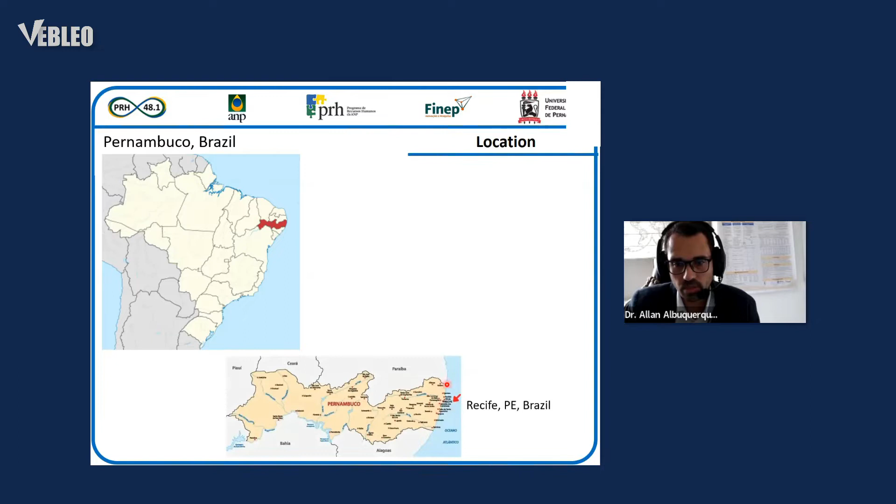I'll talk a little bit about our location. We are located in Brazil, a South American country, more specifically in Pernambuco state, located in the northeast. The capital is Recife, where we are at the Federal University of Pernambuco. We have at least, before the pandemic, 40,000 people per day, including students and professionals.

We are located in the Department of Nuclear Energy, and we have financial support from the training program for human resources financed by the Brazilian National Agency for Petroleum, Natural Gas, and Biofuels. I've been working in the PRH, where we focus on research in characterization and simulation of reservoirs, environmental biotechnology, and renewable energy. My field is renewable energy, in the bioenergy group where I'm located.

We also have an experimental biorefinery for solid organic waste. Our group has some objectives, for instance, to develop organic waste management on our campus, and also to train students and professionals, to develop research, and also to transfer low-cost technology for control purposes.

We focus on work in sustainable energy production from biomass and waste, for example anaerobic digestion using food waste and residual biomass and palm, and also second generation bioethanol production based on food waste and other raw materials, and also biodiesel production using waste cooking oil and other kinds of processes.

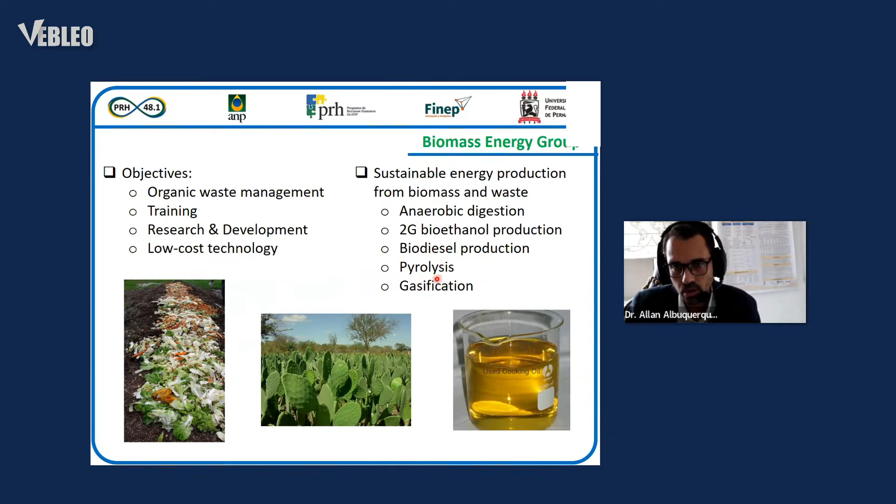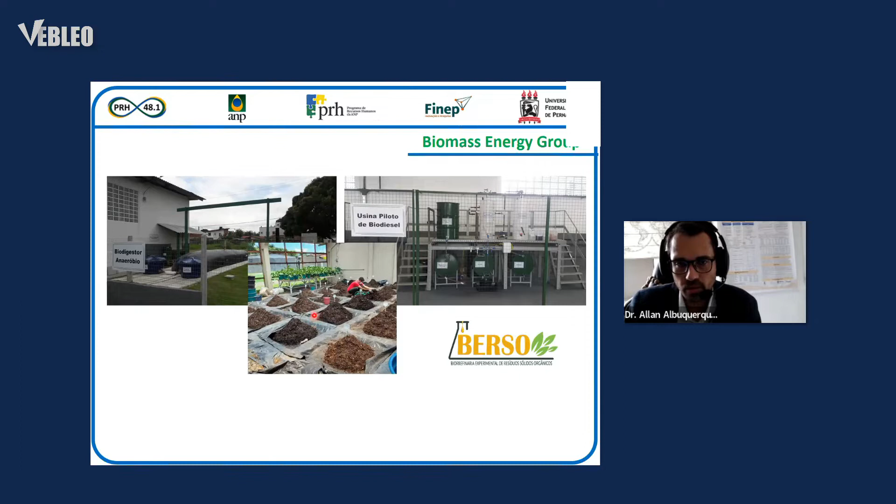We have an anaerobic digestion reactor using food waste to produce biogas, used for electricity and also for cooking gas, and also a pilot plant for biodiesel production using waste cooking oil that is used for buses from our university. We also have biofertilizer produced to be used at the university.

Starting my presentation, I'll talk a little bit about biodiesel, focusing on Brazil, since we know that the three largest producers around the world are the US, Brazil, and Indonesia. In Brazil, we started to be concerned about biodiesel in the 1970s. Biodiesel is a fuel composed of alkyl esters and can be used in internal combustion engines, and can replace partially or totally petroleum diesel.

After this event in the 1970s, for some economic reasons Brazil didn't stay too interested in biodiesel, but in 2004, because of the Brazilian National Program for Production and Use of Biodiesel, we started to pay more attention. In 2008, the ANP imposed a 2% addition of biodiesel to petroleum diesel. Since then, for macroeconomic, social, and environmental reasons, we now have 10% biodiesel in petroleum diesel this year. It's expected to reach 15% in 2023.

The main raw materials used in many countries are edible oils, and also in Brazil soybean oil is very important. But the problem is these raw materials can represent 85% of the biodiesel cost. For this reason, many authors and researchers are trying to develop biodiesel production using non-edible oils, such as rapeseed oil, crude tall oil, and others.

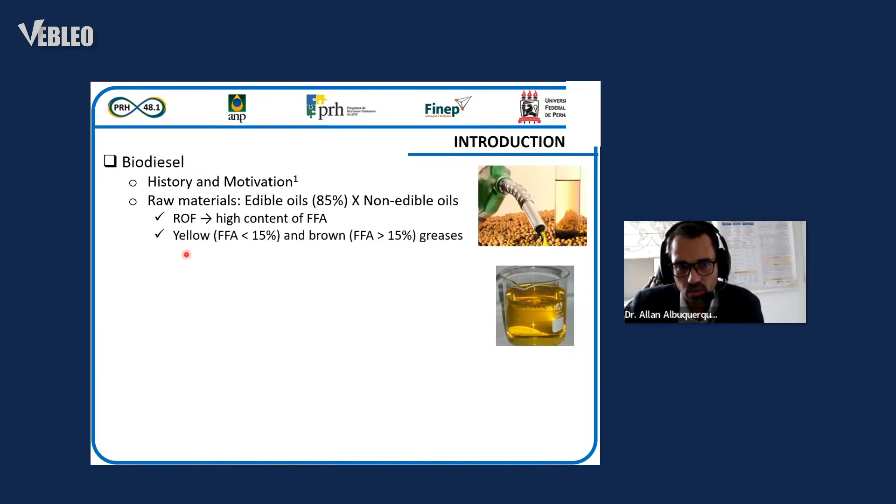Another option is residual oils and fats, ROF, composed of waste cooking oil and animal fat waste. The problem is these raw materials have a high content of free fatty acids, FFA, and can be sold as yellow grease with content less than 15%, or brown grease with greater than 15%. The advantage of using these raw materials is decreasing negative environmental impacts caused by improper disposal of waste cooking oil, and also decreasing raw material costs, which can represent 40 to 70% less than using edible oils.

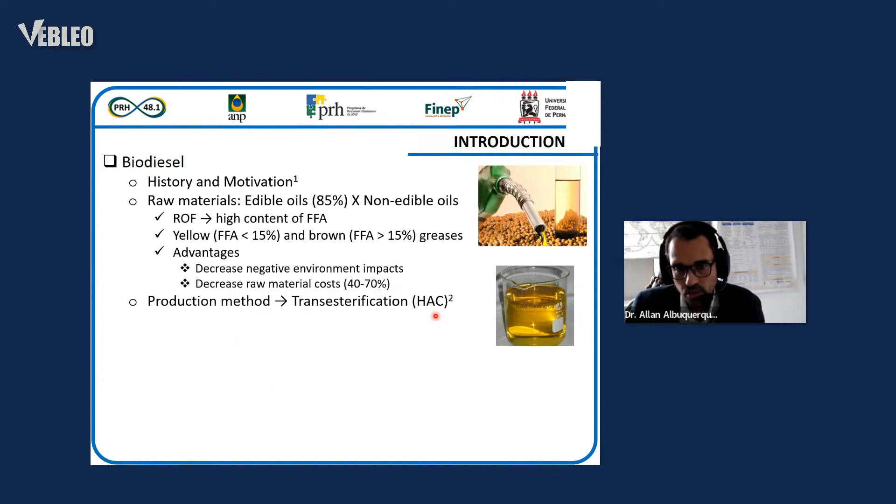We know that the conventional process to produce biodiesel is based on the transesterification reaction using an alkali catalyst. Vegetable oil, composed of triacylglycerol, reacts with 3 molecules of alcohol to produce 3 alkyl esters and also glycerol.

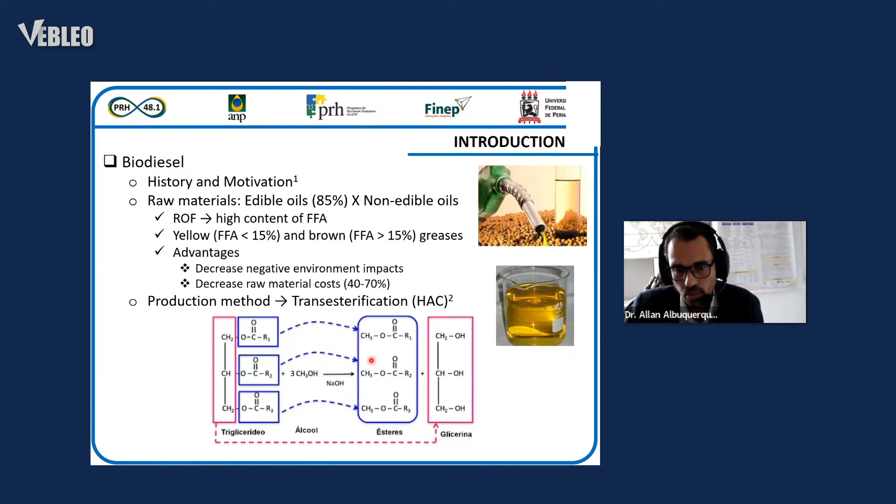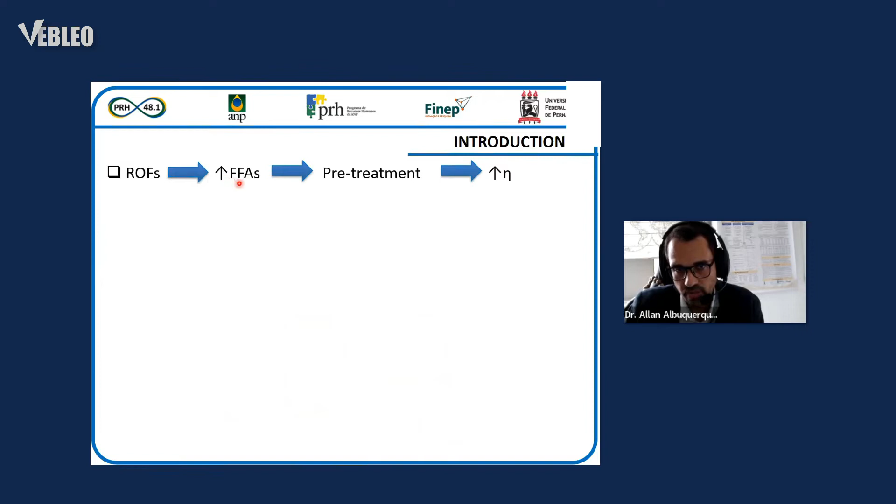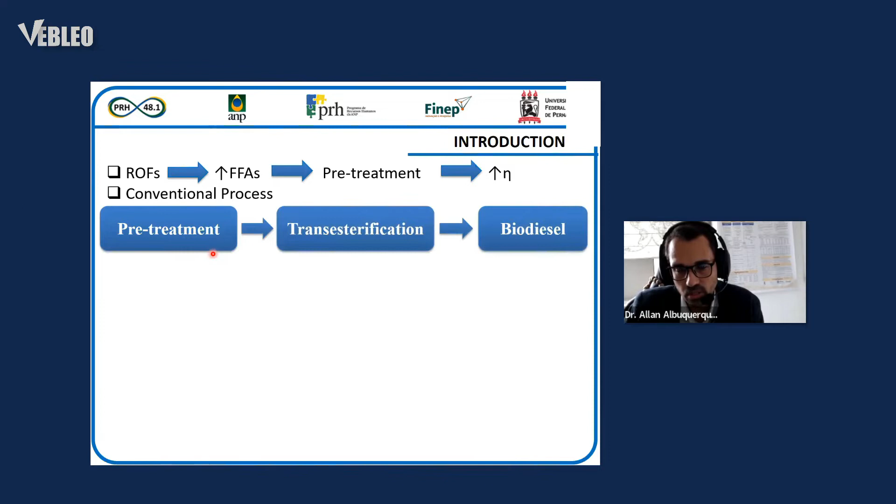The problem is ROFs have a high content of FFA, free fatty acids. In that case, we need a pre-treatment to increase the yield. The conventional process for these raw materials involves a pre-treatment before the transesterification reaction, where we use an esterification reaction on the free fatty acids in the presence of alcohol and an acid catalyst to produce alkyl ester and water. The problem is that we have more equipment in the pre-treatment, increasing capital cost, and also a glycerol washing step to remove catalyst, water, and excess methanol, which increases operation costs.

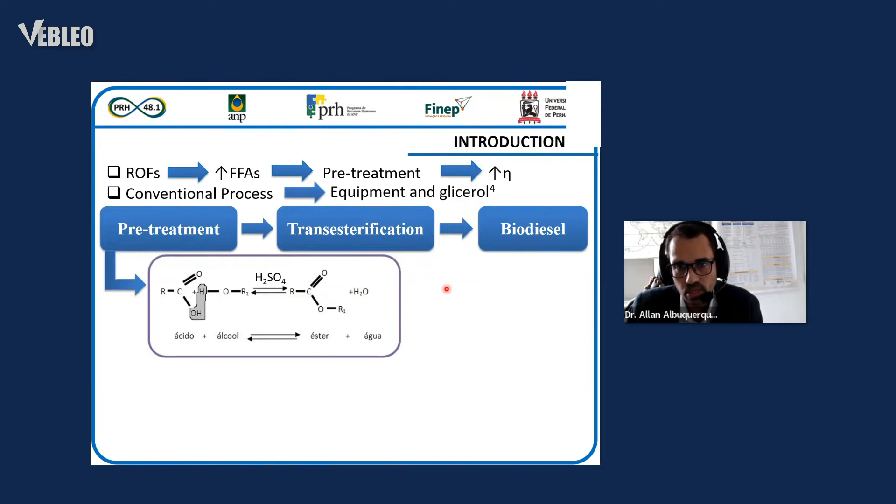For these reasons, some authors are trying to develop alternative, cheaper processes. For instance, supercritical conditions to carry out both esterification and transesterification in the same reactor, or to try to separate FFA from the triacylglycerols, or to use solid catalysts, which in my opinion must be the most promising one.

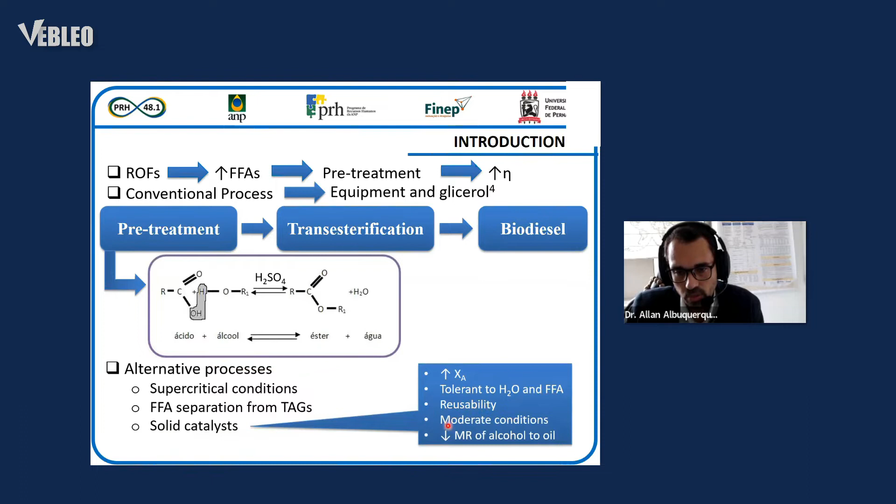Many authors are trying to develop solid catalysts that can increase conversion, be tolerant to water and FFA, with good reusability, operate in moderate conditions, and with low molar ratio of alcohol to oil. In this work we use Aspen Plus from Aspen Tech to design, simulate, and optimize some processes to make comparisons.

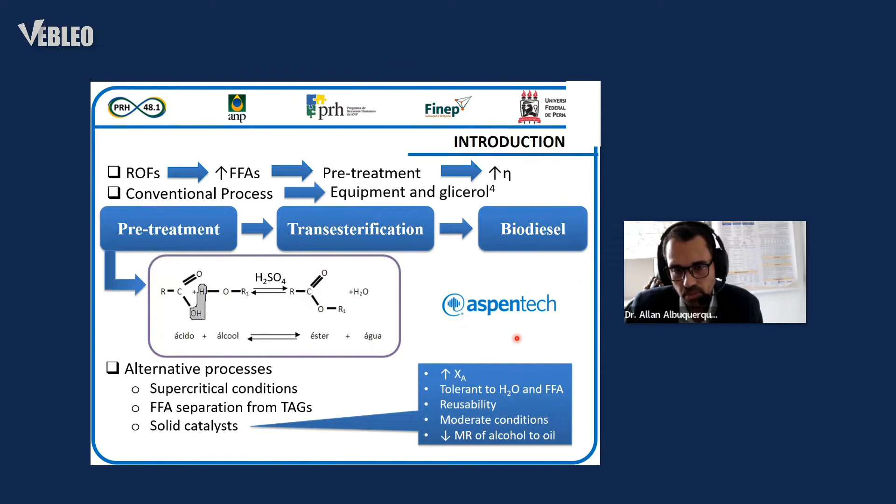There are other options, but we are focusing in this work on solid catalysts in reactive distillation. With reactive distillation we can use separation and reaction in the same equipment instead of using a reactor plus a distillation column. This way we can decrease capital costs, and also decrease solvent costs because we have a reflux ratio of alcohol, and also alcohol vaporizing in the column.

We also try to use low-cost raw materials, such as residual oil, fats, and crude tall oil, and in recent works we are working with ethanol.

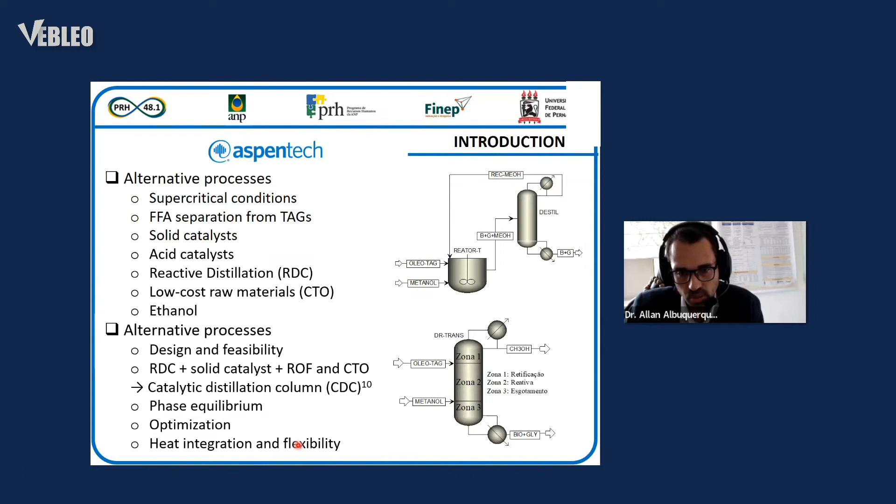We will present some results from an alternative process based on the design and feasibility analysis, combining reactive distillation and solid catalyst inside packing. We have a catalytic distillation column using these two kinds of raw materials. We also noted the absence of a phase equilibrium model applied to the reactive distillation column, so we developed this phase equilibrium model, along with some process optimization and heat integration flexibility studies.

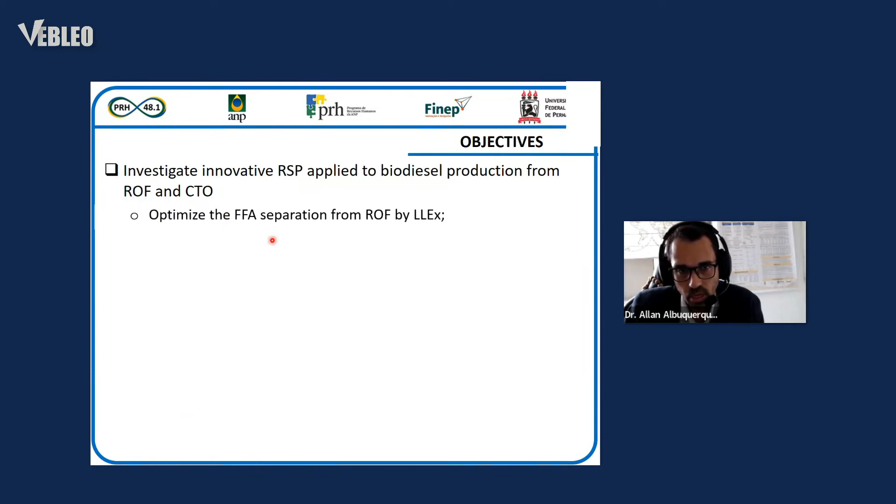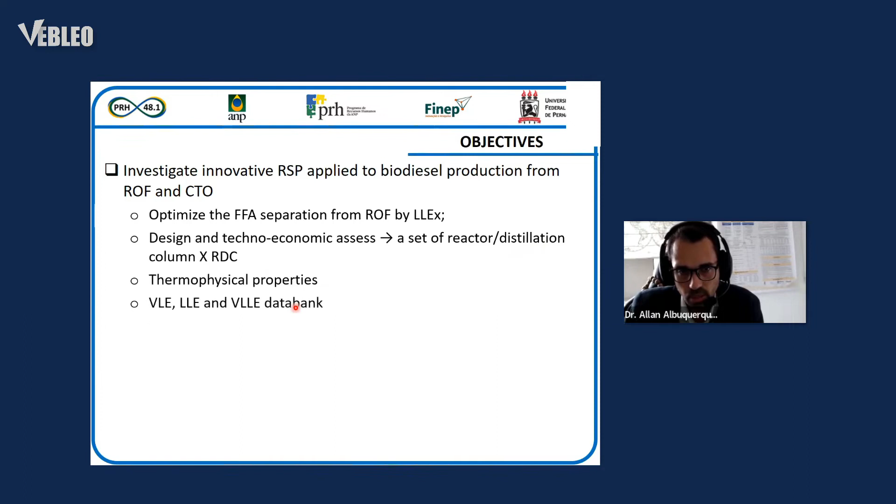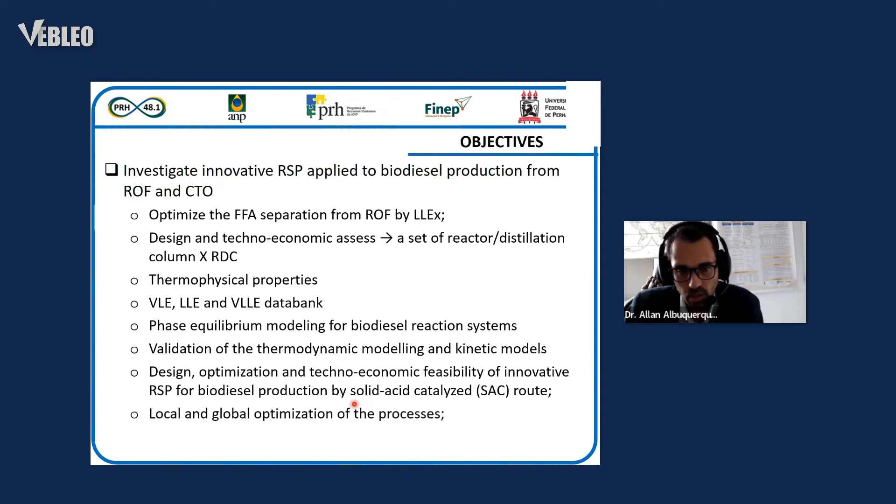The objectives are to investigate an innovative reactive separation process to do reaction and separation in the same equipment using these low-cost raw materials, to optimize separation of free fatty acids from the oil, design this process and make a comparison about techno-economic aspects between a reactor-distillation setup and a reactive distillation column. Also to estimate thermophysical properties, construct a data bank and phase equilibrium modeling to validate it, and design, optimize, and compare the process in terms of techno-economic aspects, including optimization and heat integration flexibility study.

The first paper that we published after developing this work in my PhD was on optimization of the extraction of free fatty acids applied to biodiesel production, to achieve these objectives.

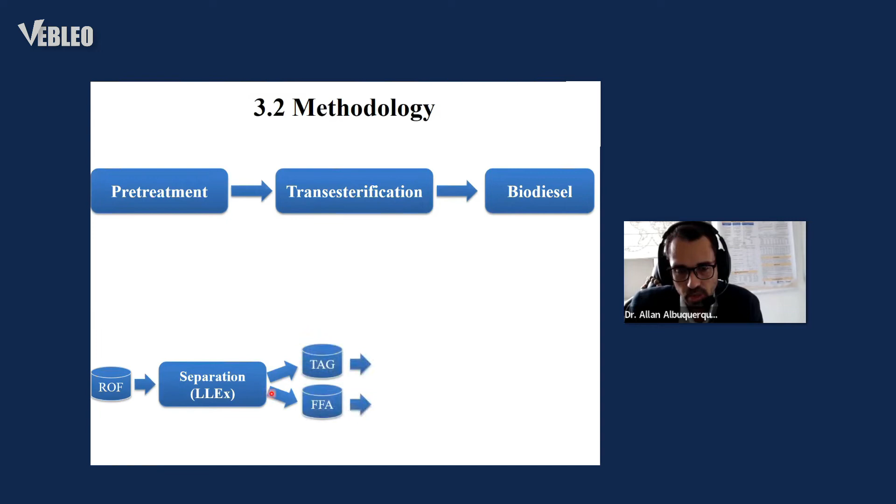This is the conventional process I told you about before. The idea here is to use an extraction column with methanol as a separating agent for triacylglycerol and free fatty acids, and carry out the reactions in separate reactors to produce biodiesel.

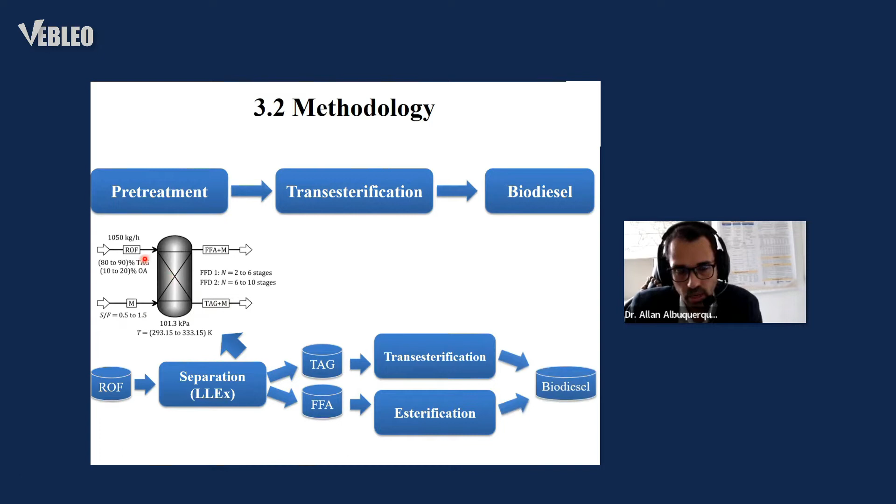We try to optimize this column based on three variables: number of stages, temperature, and solvent-to-feed ratio, investigating two cases of yellow and brown grease. We also designed the process to produce biodiesel and compared these two options.

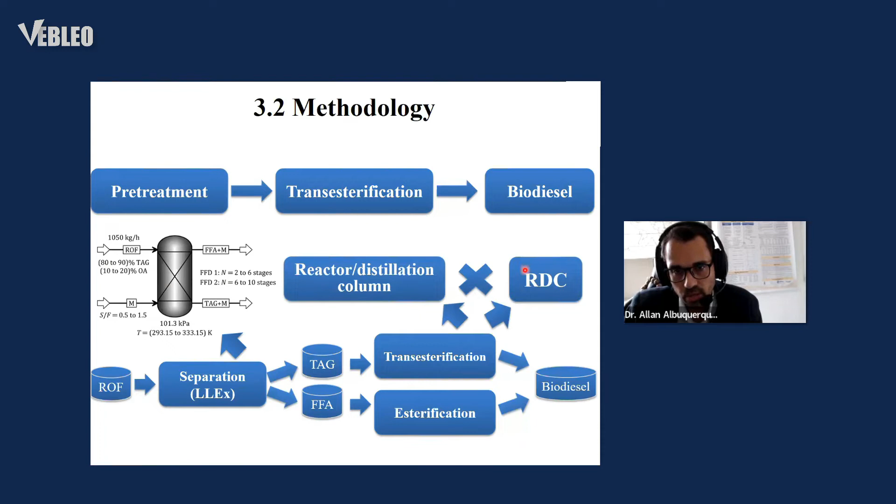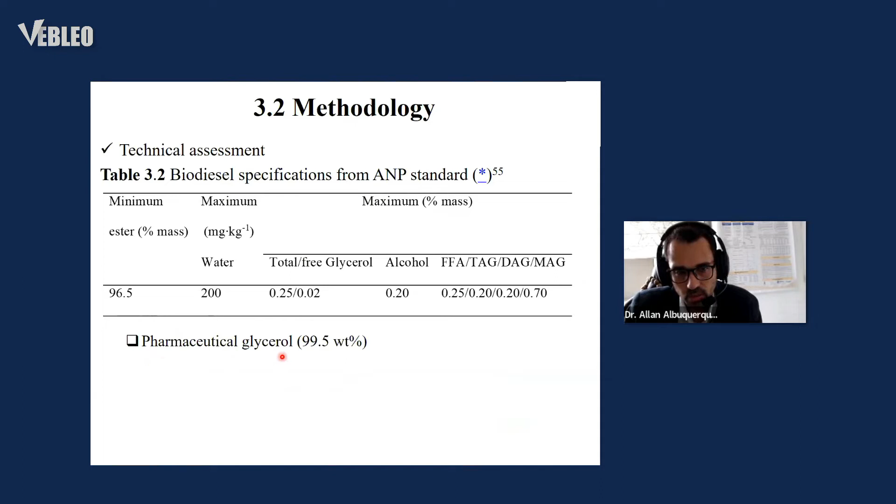The technical standard for biodiesel is given by ANP, and we also try to obtain pharmaceutical-grade glycerol. For economic feasibility comparison we use economic indicators such as total annualized cost, break-even price, payback period, and return on investment.

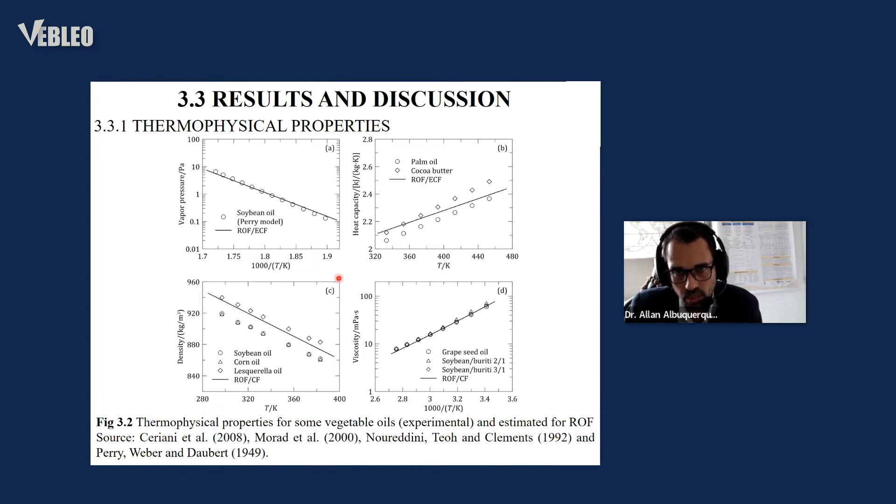We estimated some thermophysical properties for acylglycerols because the software had trouble representing them. We also developed thermodynamic modeling for the liquid-liquid equilibrium for the separation.

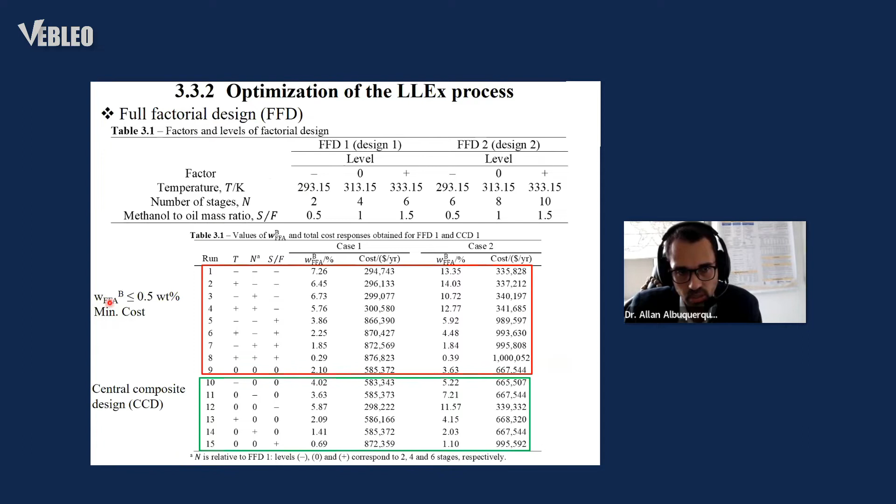We also did a full factorial design with the three input variables, including two responses: the cost and the free fatty acids mass fraction in the oil stream, to reduce these values.

We optimized this process for the yellow grease case and the brown grease case, and identified optimized conditions, helping to minimize costs in this process while being technically feasible to produce biodiesel.

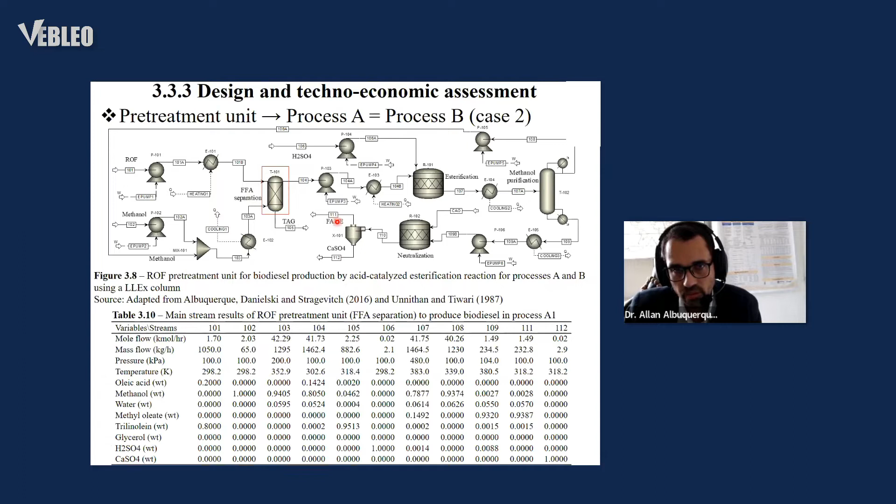This is process A, and B the pretreatment unit, which is the same for both processes, where we have the FFA separation. After that, we have the transesterification unit for process A, using a reactor and a distillation column. Process B is different because there is a single column to do reaction and separation, the reactive distillation column. In both processes we achieve the biodiesel standard and pharmaceutical-grade glycerol.

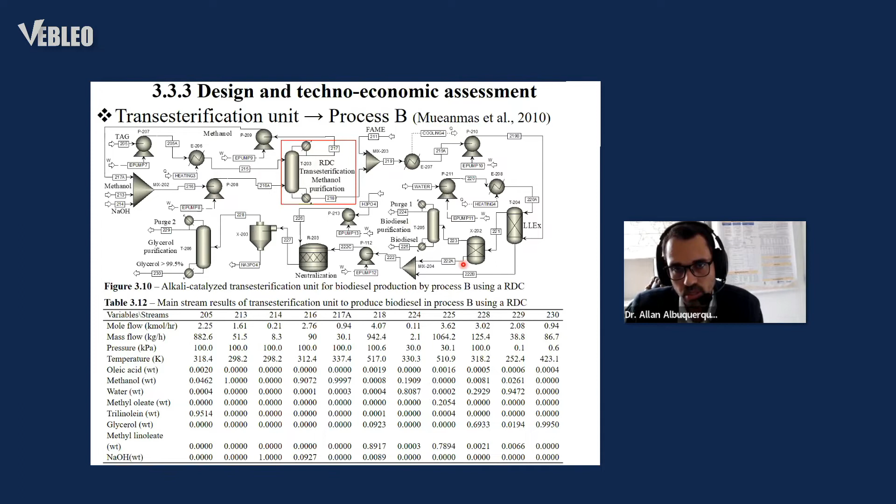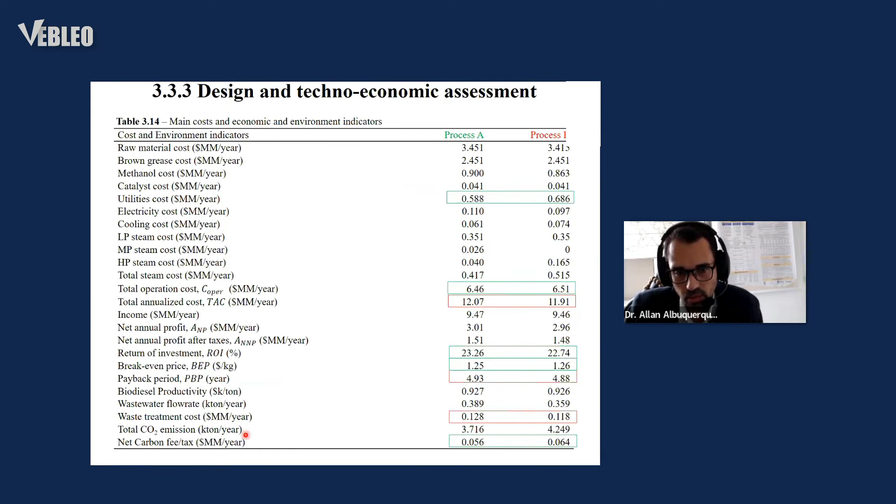The investment cost was lower for process B because of the single piece of equipment. Some indicators are very close between the processes, and environmental aspects could be the deciding factor for choosing the best process.

The second paper identified the absence of a phase equilibrium model in the reactive distillation column capable of representing the vapor-liquid equilibrium, and also the vapor-liquid and liquid-liquid equilibria.

Using a solid acid catalyst capable of doing esterification and transesterification at the same time, the reactive zone, we also validated the experiments reported in the literature.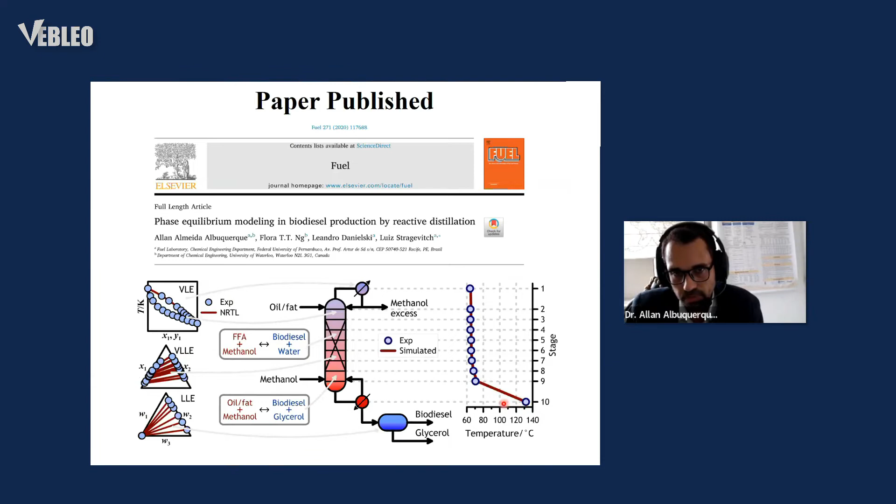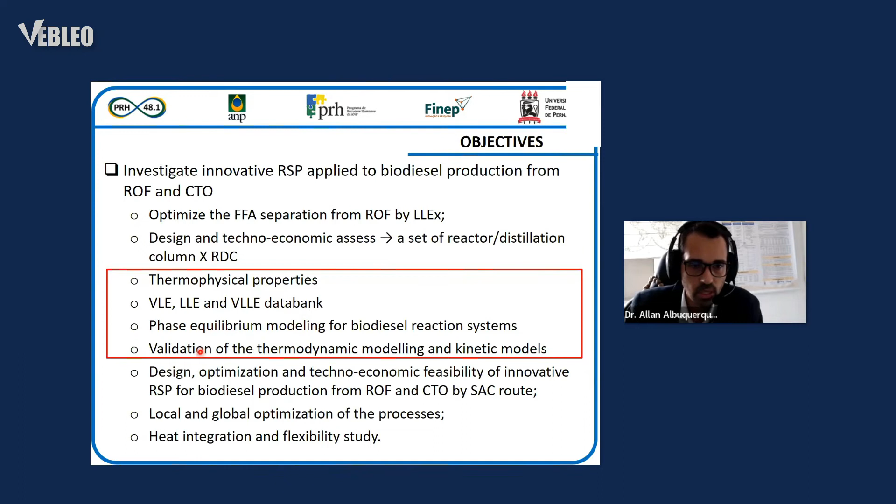To achieve these objectives we estimated thermophysical properties, constructed the data bank, developed the phase equilibrium modeling, and validated this modeling. These are the steps carried out.

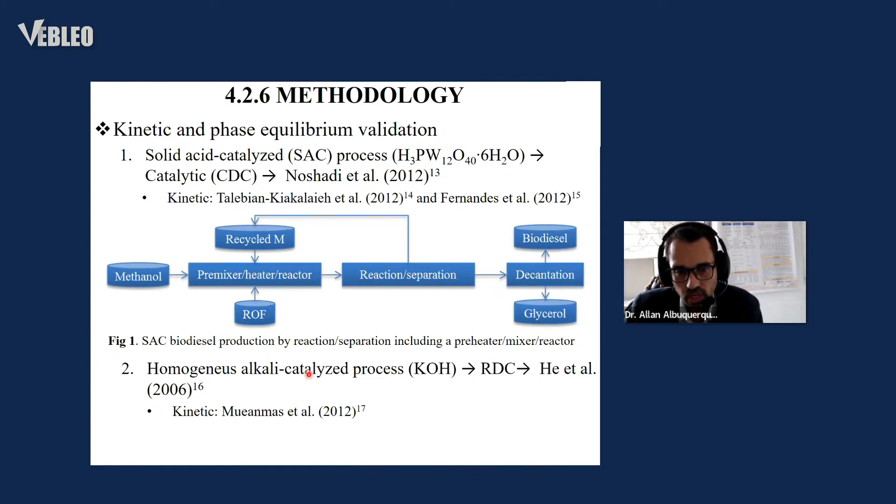Two works were chosen to support the experimental data: one on a solid acid catalyzed process using catalytic distillation to produce biodiesel by esterification simultaneous to transesterification, and also a homogeneous alkali catalyzed process, which is well known.

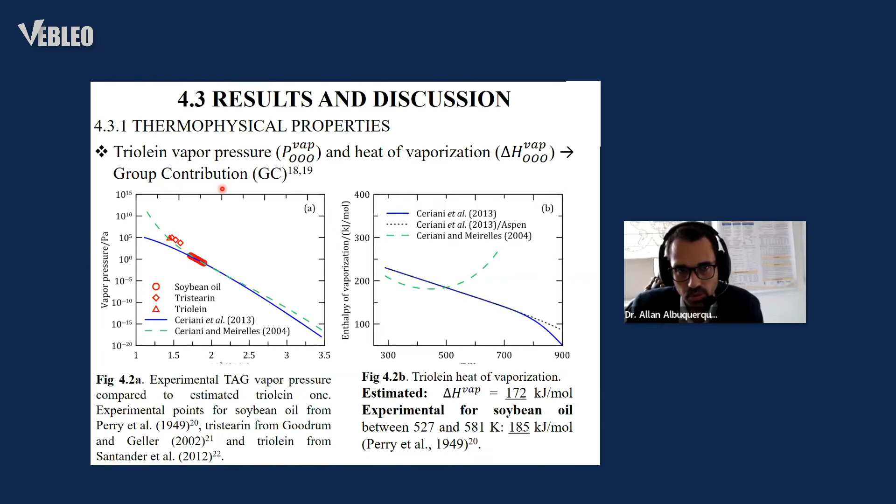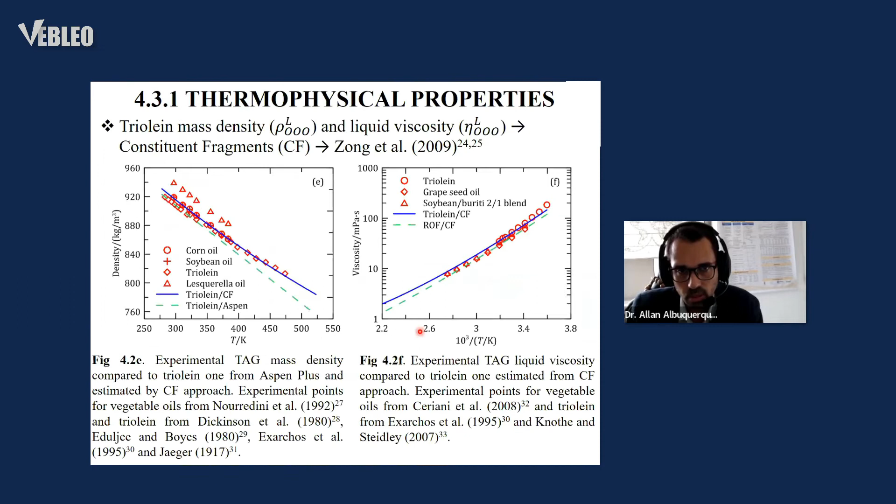The thermophysical properties were estimated using group contribution methods, in this case vapor pressure, and constituent fragments approach for other properties. We developed the data bank, in this case a VLE data bank with almost 6,000 data points.

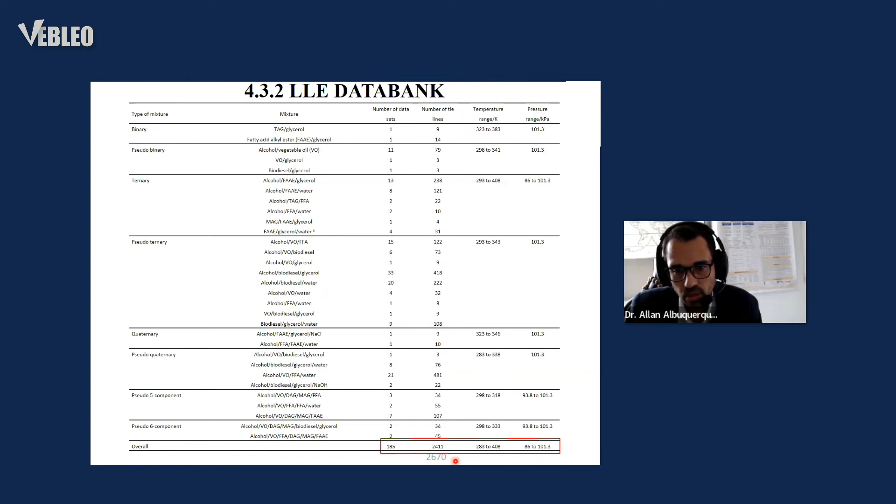We classify them and also evaluate the thermodynamic consistency; only the systems that passed this test we use. The LLE data bank had almost 2,500 data points. In the VLLE data bank, we had just 46 data points from alcohol, alkyl esters, and glycerol systems.

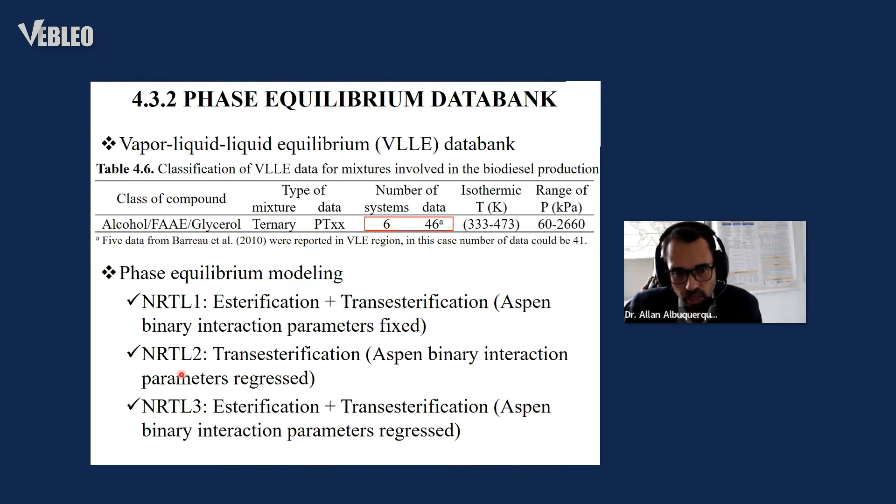We developed 3 parameter sets for the NRTL model: one applied for esterification and transesterification reactions inside Aspen Plus, another, NRTL3, that we can use in any software without the Aspen license, and NRTL2, which is applicable for transesterification reactions.

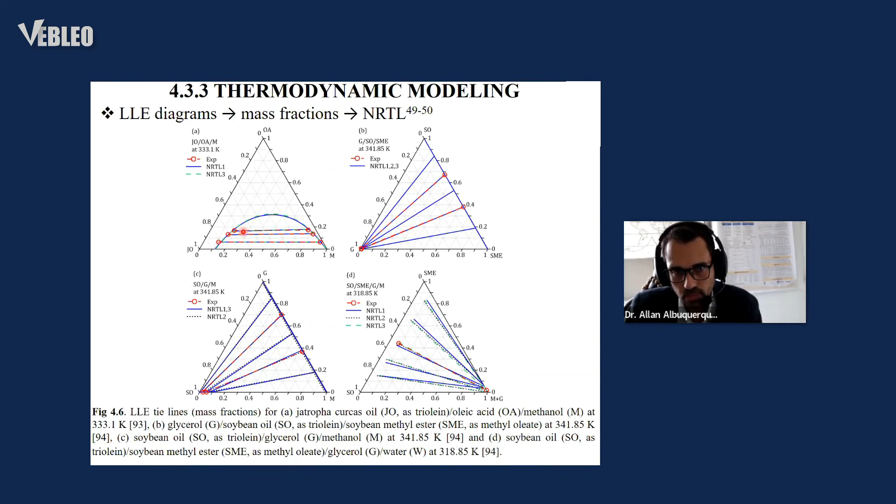And the VLE diagrams are well represented for the parameter set, and also the LLE diagrams. In that case, one parameter set can represent the 3-phase equilibrium, and also the VLE diagrams.

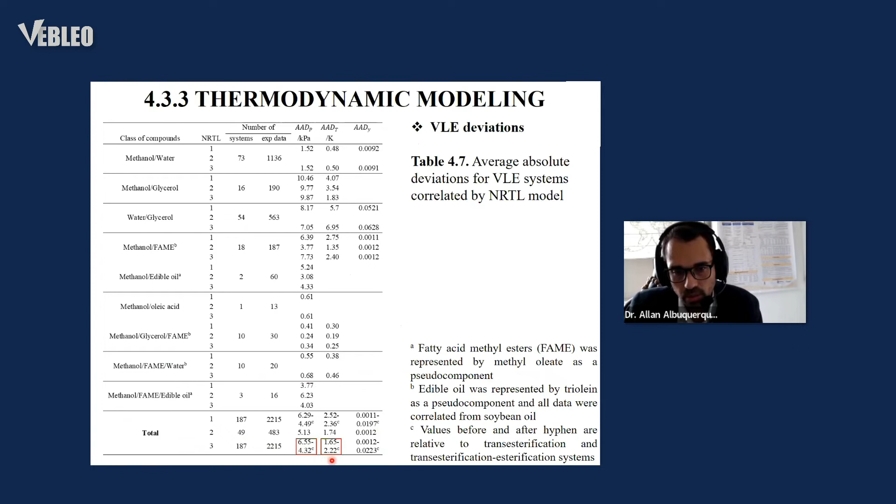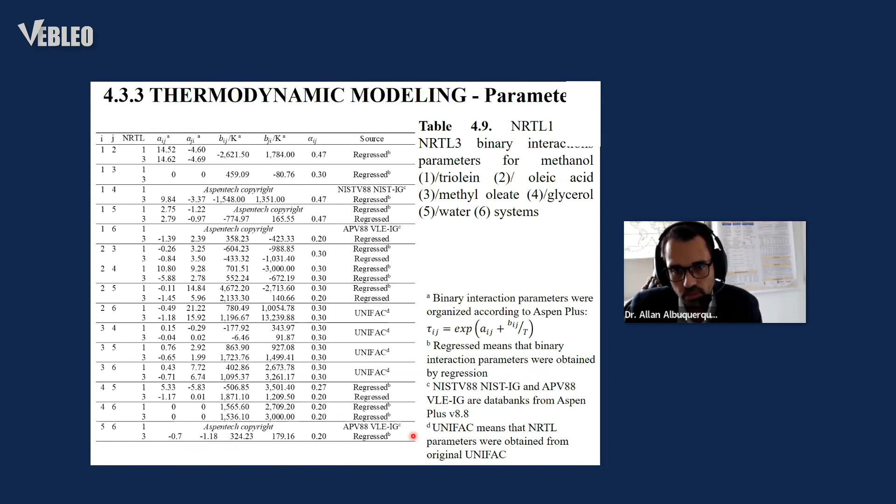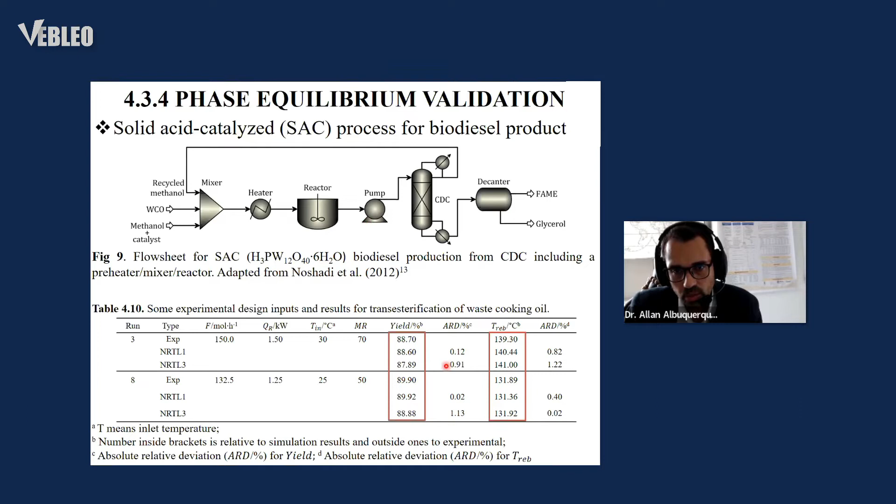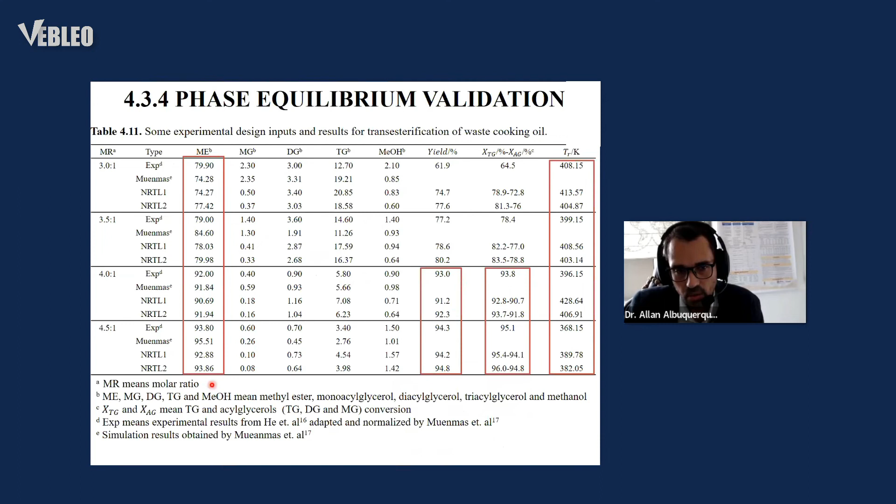Observing the deviations, NRTL3 presented lower deviations for VLE and LLE, but for VLLE, NRTL1 should be chosen for modeling. We validated this modeling also using kinetic modeling for the solid acid catalyzed process, obtaining yields and temperature profiles very close to the experimental, and also for the homogeneous alkali catalyzed process, with better results using NRTL2, which is specific for transesterification reaction.

The third paper is on reactive separation process applied to biodiesel production from residual oil and fats: design, optimization, and technical economic assessment using solid catalyst. We studied first the base case process based on a catalytic distillation column, where we have both reactions, esterification and transesterification, using this solid catalyst, with residual oil, fats, and methanol in liquid phase.

We produce biodiesel and glycerol, and methanol is recycled. We compared this with an alternative process using a catalytic absorption column. Because we have a low reflux ratio there, we could remove the condenser and also the reboiler, to compare if the biodiesel product is cheaper or not. Both reactions again use the same catalyst, and the methanol in that case is fed in vapor phase.

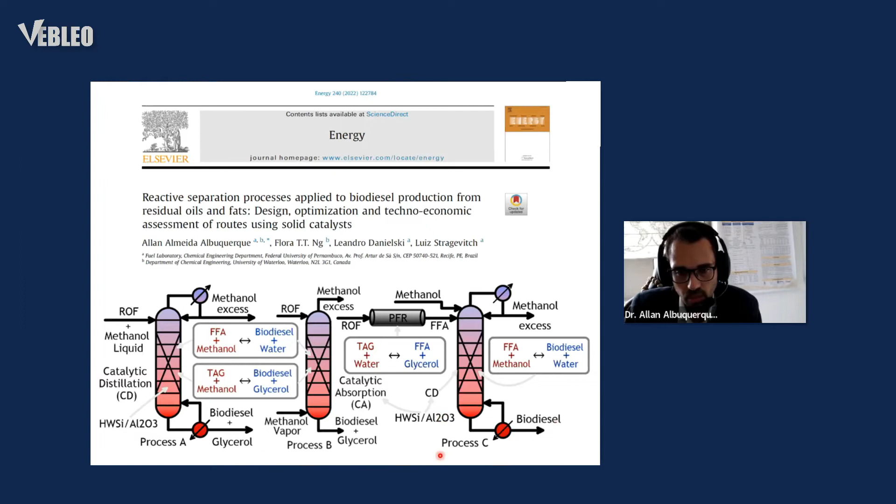The third process is an industrial process found in Brazil based on the route of hydroesterification, where you have a plug flow reactor to produce hydrolysis, and after that an esterification reaction using catalytic distillation to produce biodiesel, making comparisons with the other two processes. We then try to achieve these objectives: design, optimization, technical economic assessment using ROI.

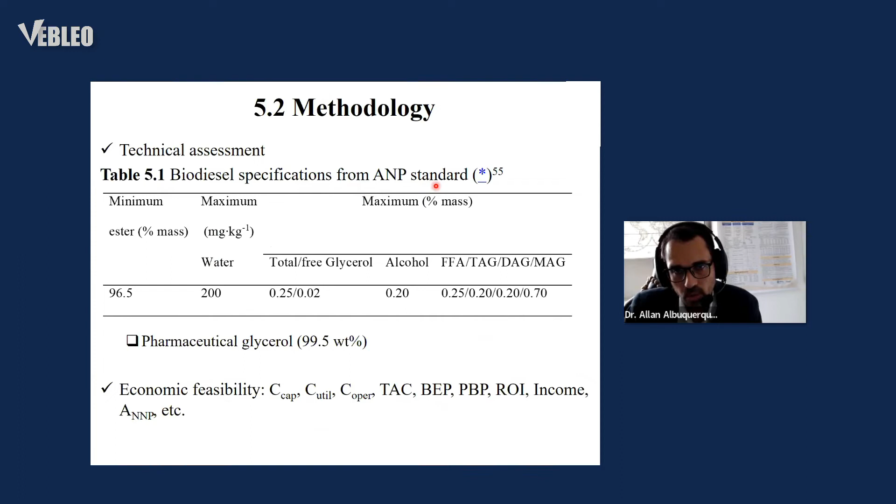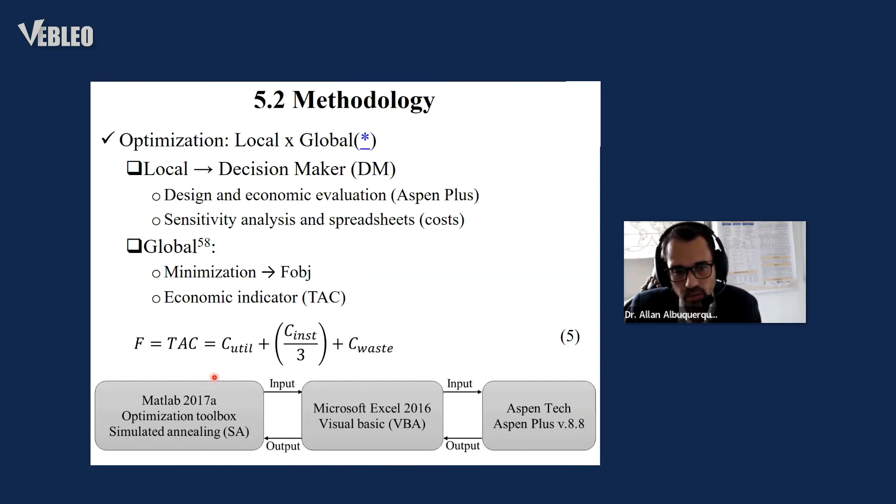We also did optimization, heat integration, and flexibility studies. The same biodiesel technical standard was used, along with economic indicators. The optimization was done locally by the decision maker, and also globally using an objective function of total annualized cost, adopting utility cost, installed cost, and waste treatment cost. We connected Aspen Plus with MATLAB using the optimization toolbox.

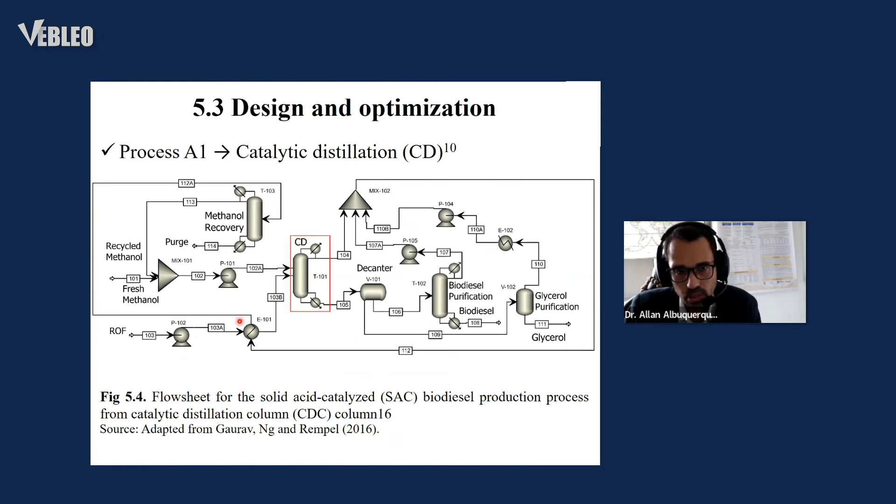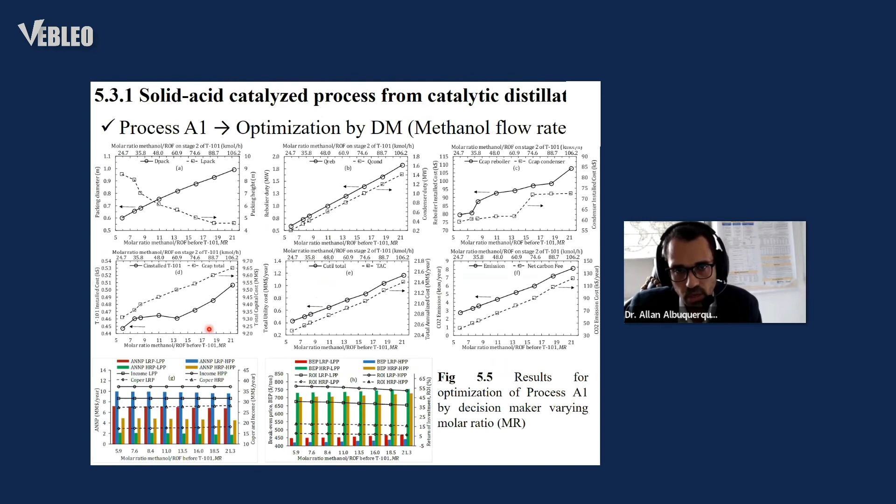This is the base case process, catalytic distillation with esterification and transesterification at the same time. We don't have pretreatment units, and we produce glycerol and biodiesel. We made some optimization in the methanol feed flow rate and also other variables.

We also studied the catalytic absorption column, and removed in that case the reboiler and the condenser. For both of these processes, we identified that we achieved the biodiesel standard and also glycerol.

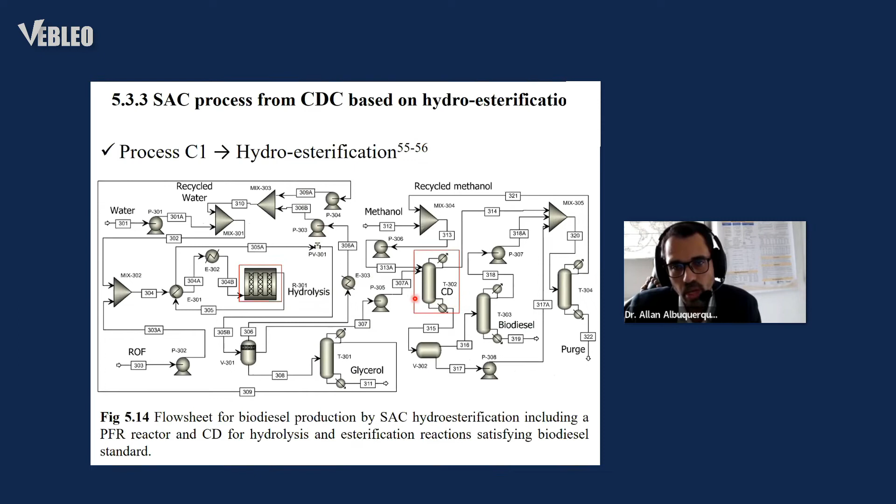The third process, hydroesterification, uses a PFR reactor for hydrolysis and a catalytic distillation column to produce biodiesel. Again, we obtained biodiesel achieving the standard.

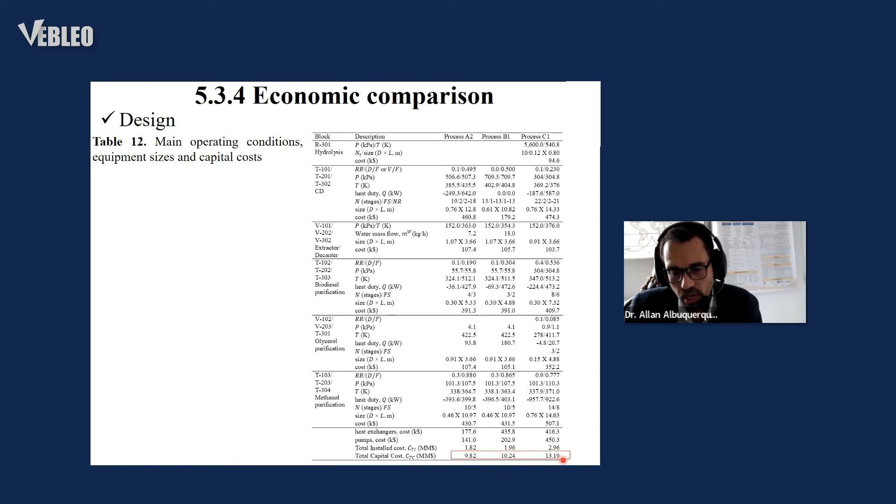But process C1, hydroesterification, has in that case a higher capital cost, much higher energy usage, and also operation costs, waste treatment costs, and CO2 emissions. In that case, processes based on catalytic distillation column and catalytic absorption column were the better processes to use with solid acid catalyzed residual oil fats.

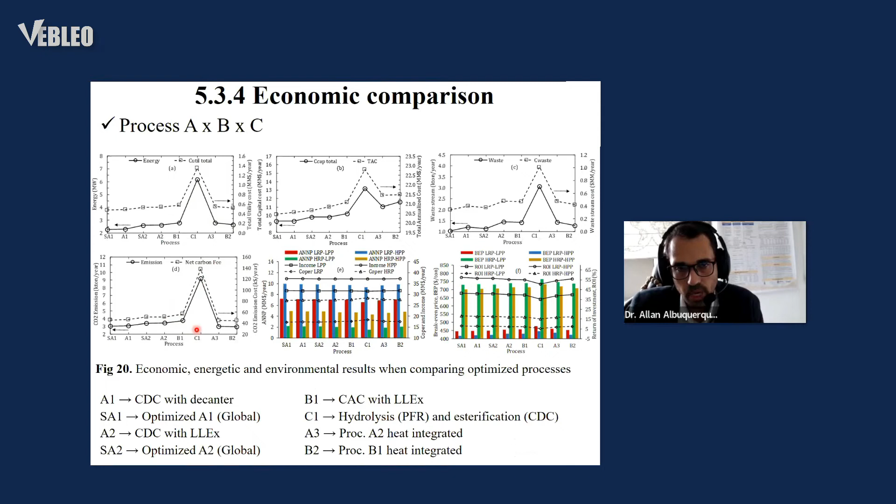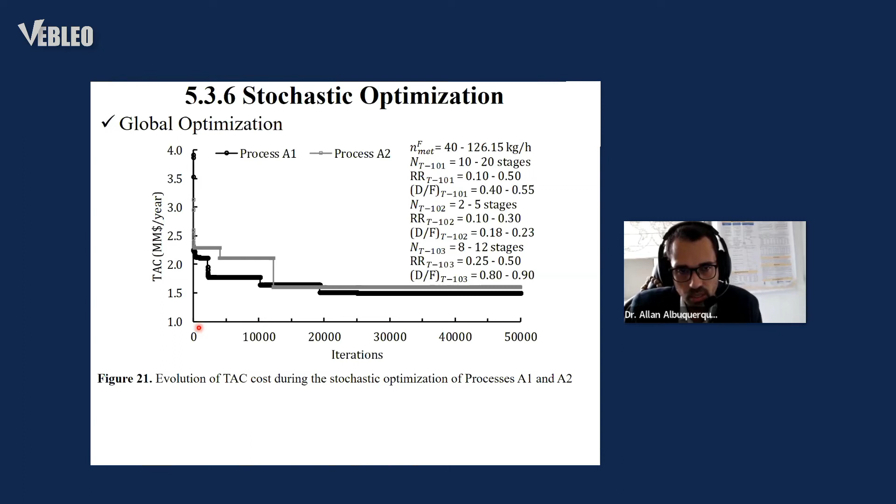But because the process based on catalytic distillation column is much simpler than the catalytic absorption column, we decided to do a global optimization for this process, and by changing 10 variables, we identified $2.5 million per year of reduction through optimization. We also did a flexibility study, since we started with an FFA composition of 15%.

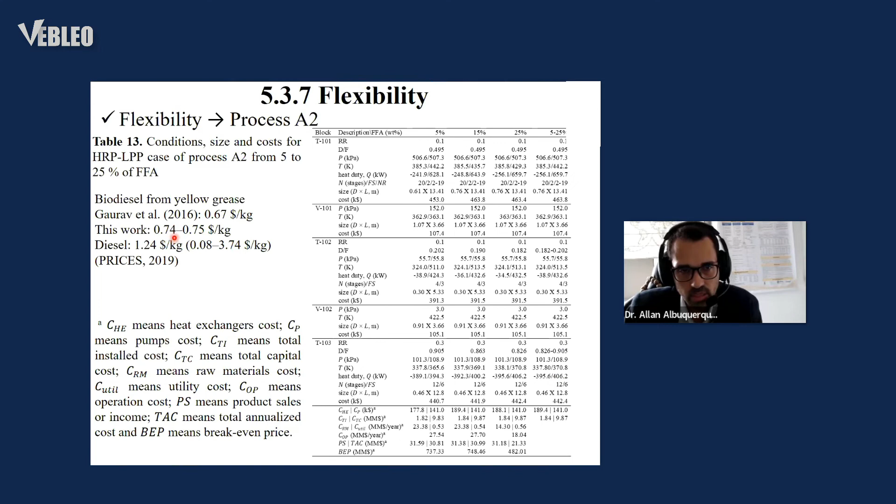The industry can receive 5% or 25% FFA composition, so we designed a process capable of working with this range. We obtained a biodiesel with a price of 74 cents per kilogram, which is very close to literature values.

And the last paper presents a new process for biodiesel production from tall oil using catalytic distillation. Tall oil is a byproduct obtained from the kraft pulping process in the paper industry, and this route is very well developed in the US and other countries such as Canada.

Crude tall oil has free fatty acids, resin acids, and neutral compounds. We need to separate water using a dehydration step, then a distillation column to remove tall oil pitch. In the conventional process, we have 3 more columns to remove tall oil rosin containing resin acids, and to produce distillate tall oil with a mixture of free fatty acids and resin acids, plus tall oil fatty acid, the important product for biodiesel.

In that case, we needed to achieve 99.28% to be technically feasible to produce biodiesel.

The alternative process we propose is based on 3 distillation columns instead of 4. We have only 2 distillations, and in the last one, 3 products are produced: distillate tall oil, tall oil rosin, and tall oil fatty acids.

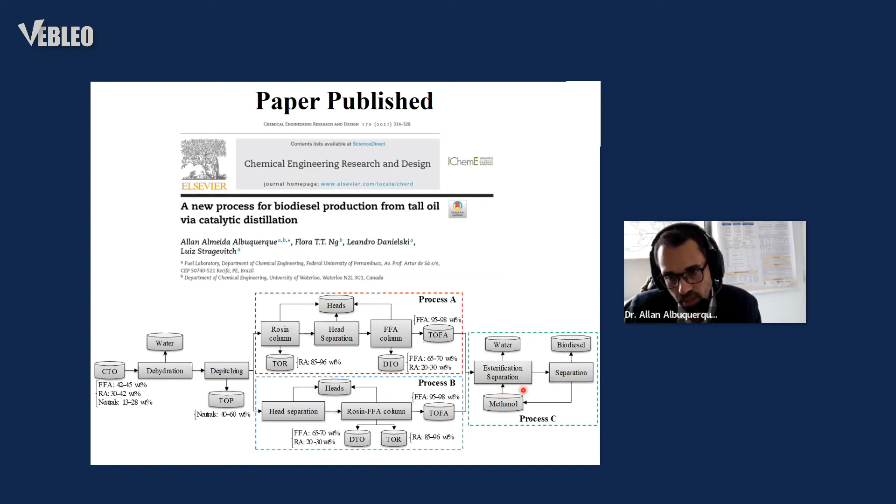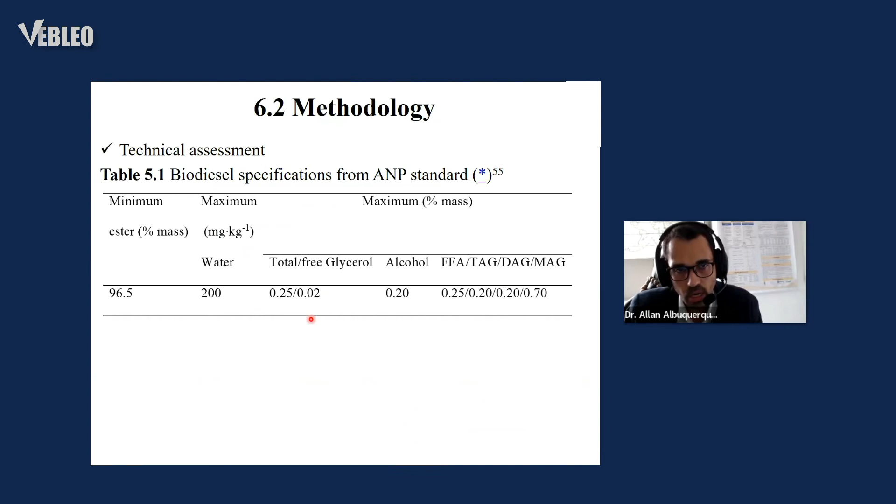The objectives are the same, but using crude tall oil. The standard for technical assessments is the same, as are the economic indicators. We studied 3 different crude tall oils.

We started with a sample from the US, using 6 different kinds of fatty acids, 6 rosin acids, a neutral compound, and water. For the pre-treatment step, we used the UNIFAC model.

After obtaining the tall oil fatty acids, we found a much higher concentration of oleic acid. For this reason, we used the NRTL model with this pseudo component for the esterification reaction.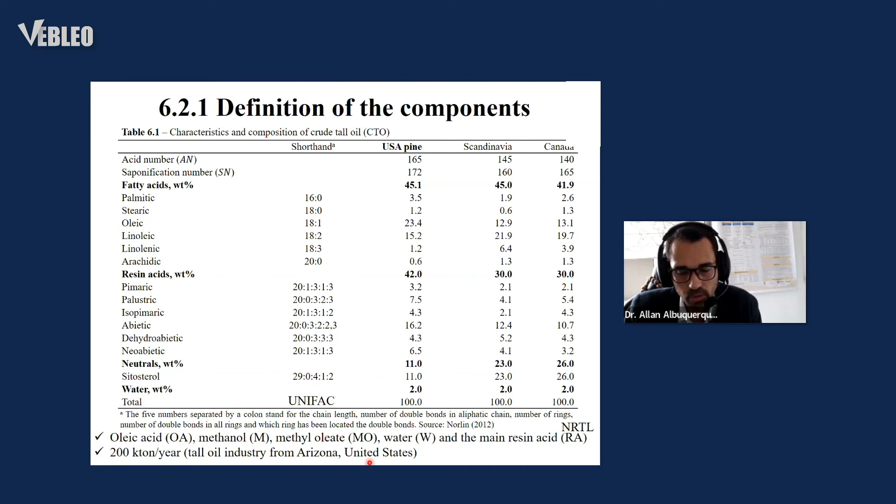The feed flow rate was based on industry in the United States. We also needed to represent the thermophysical properties of resin acids using this model. The kinetic model was a user one based on Fortran code, constructed based on the kinetics from Tesser.

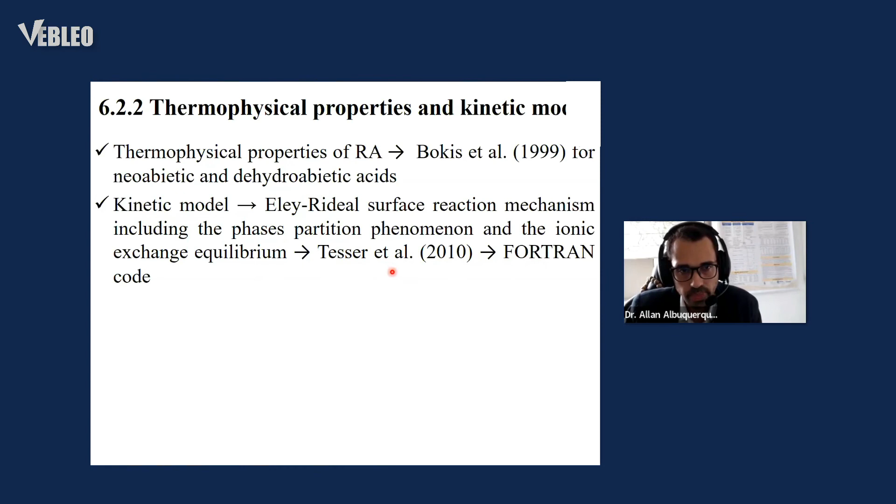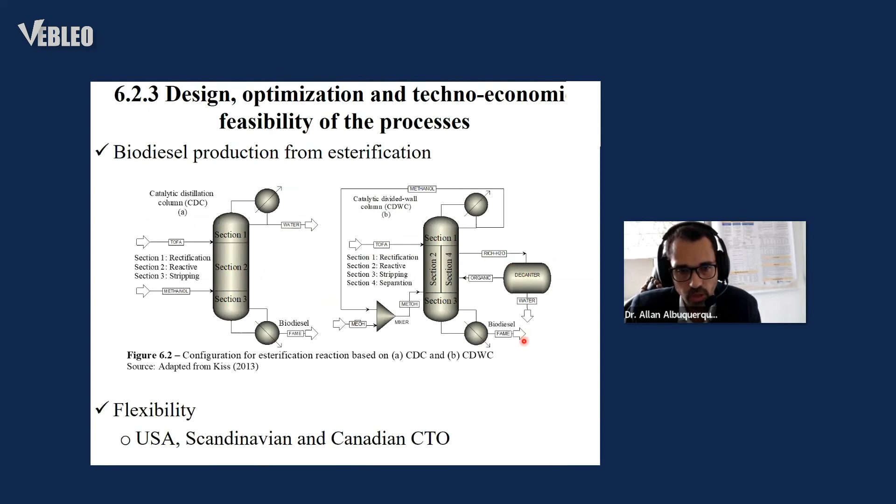We also investigated a catalytic divide wall column, because we were worried about water deactivating the catalyst. We tried to remove water here, and did a flexibility study using 3 types of CTO. This is the validation of the kinetic modeling.

Process A, using 4 distillation columns, we obtain all byproducts and also tall oil fatty acid, but in that case it was not possible to obtain 99.28%. This process was not feasible to produce biodiesel.

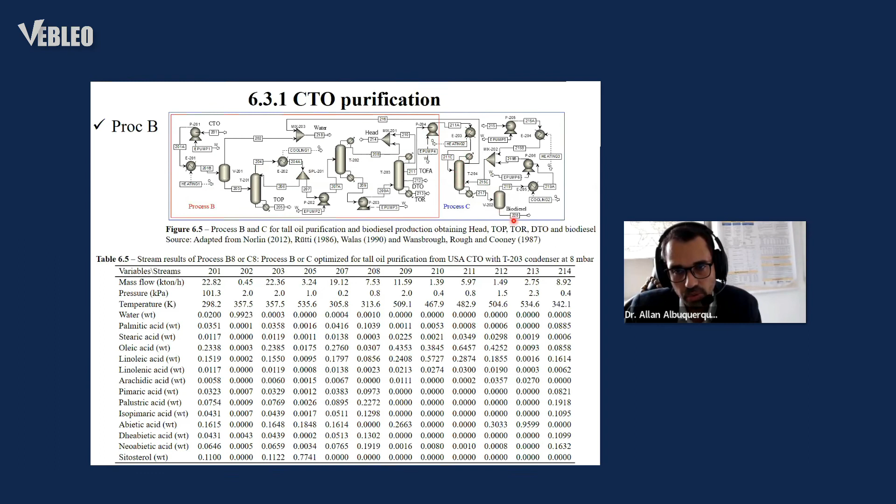In contrast, process B, using 3 columns, made it possible to obtain this concentration. We then tried to produce biodiesel using a catalytic distillation column for the esterification reaction, and achieved the biodiesel standard in that case.

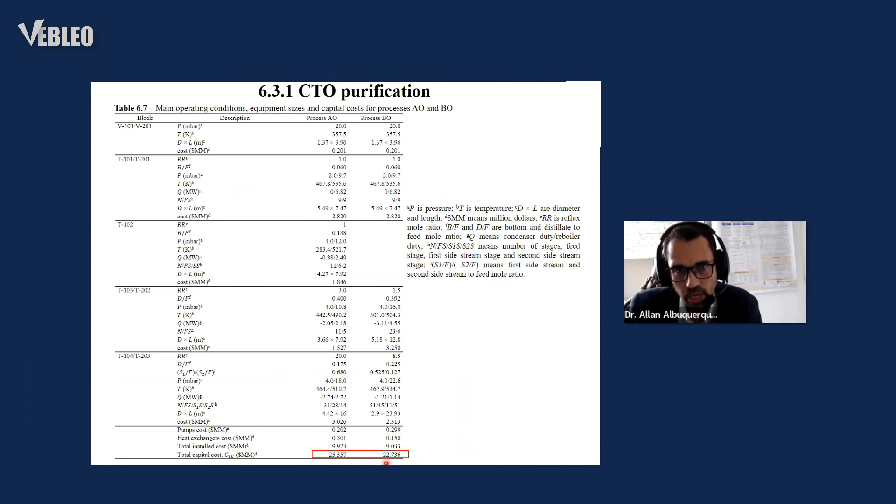We compared this process with process A, since both have 3 columns. We found lower capital cost, and other energy usage and economic indicators much lower than process A.

We also concluded that when you have a higher concentration of free fatty acids, you get a higher profit, because a higher concentration of resin acids requires more energy to separate, resulting in a higher cost.

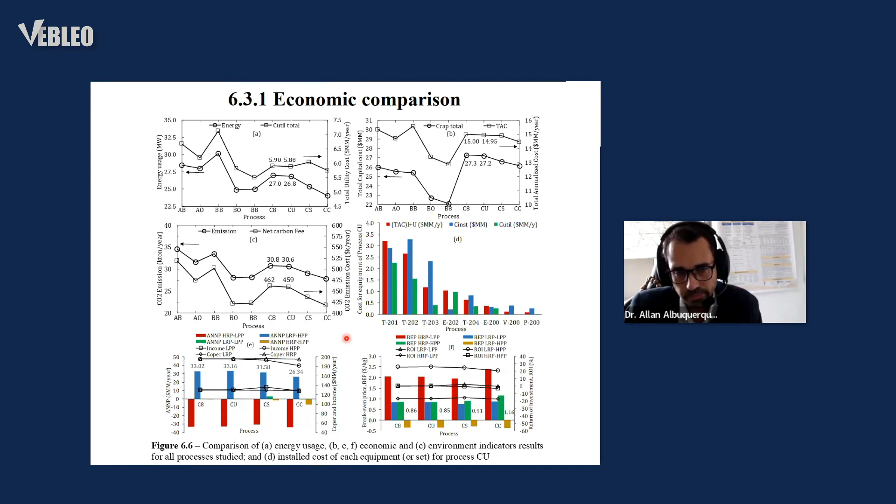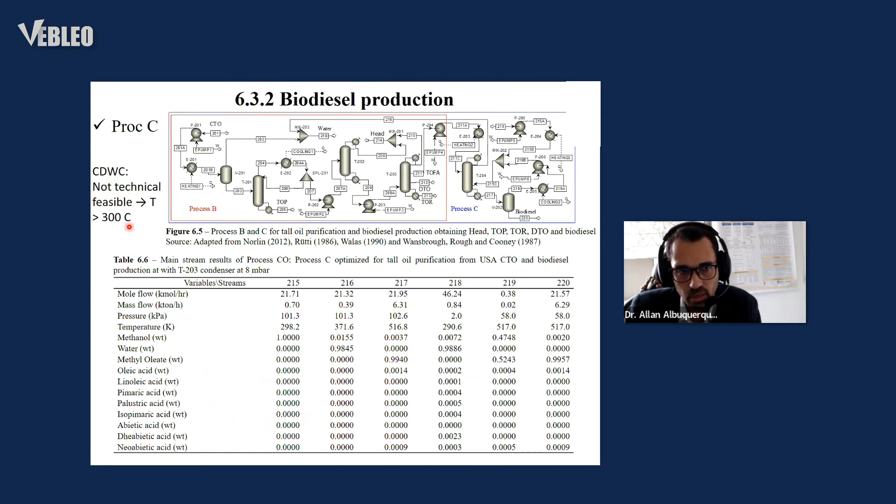These are the results from the biodiesel production, process C. We also investigated the catalytic divide wall column, but it was not technically feasible, because we identified temperatures greater than 300 degrees that can deactivate the catalyst in the reactive zone. These are some profiles from the column.

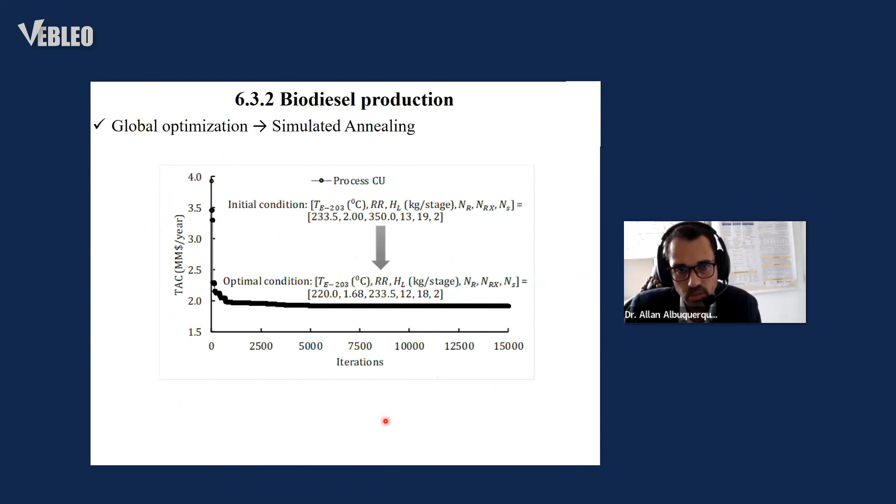We also carried out global optimization for process CU to produce biodiesel, and made a study of flexibility using 3 different kinds of CTOs. We obtained at least 82 cents per kilogram for biodiesel for the Scandinavian sample, and at least $1 per kilogram for the sample from Canada.

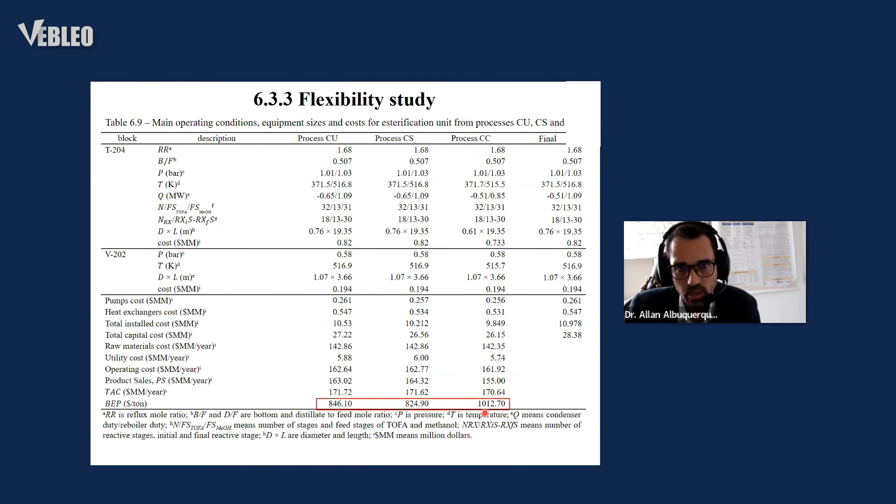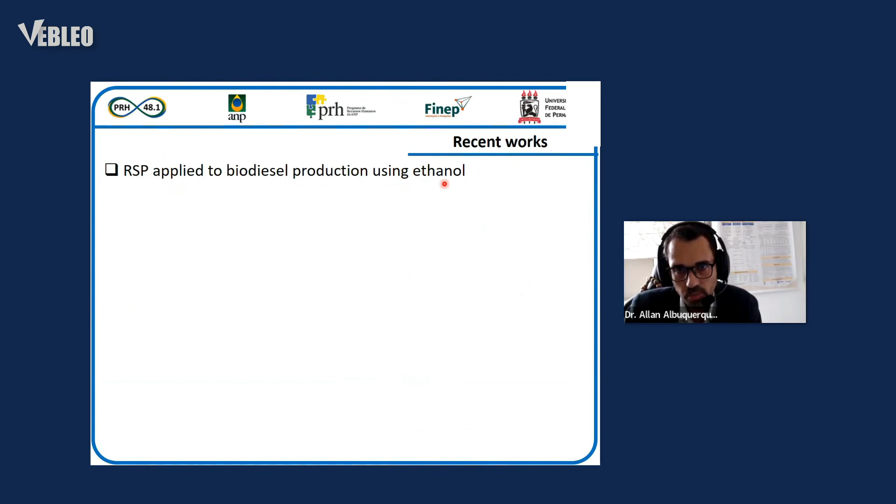In recent work, we are trying to develop this process applied to biodiesel production using ethanol. We have co-op students working on phase equilibrium modeling based on the NRTL and UNIQUAC models, and other students working on validation of profiles inside the column, as well as design, optimization, and techno-economic assessment of this process using a solid acid catalyst.

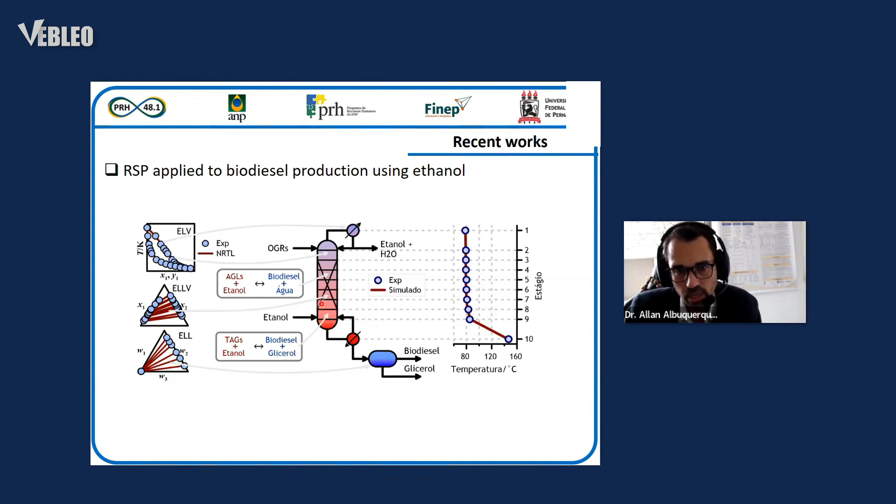We also published another paper in this area using a different reactive separation process: an integrated process of absorption and reactive distillation, with a reactive zone at the top and an absorption zone at the bottom. We feed the azeotropic mixture of ethanol and water in the vapor phase at the bottom, and glycerol is used to dehydrate this water, obtaining ethanol close to anhydrous for the reactive section, which uses a transesterification reaction. We obtained very interesting results producing biodiesel, achieving the standard.